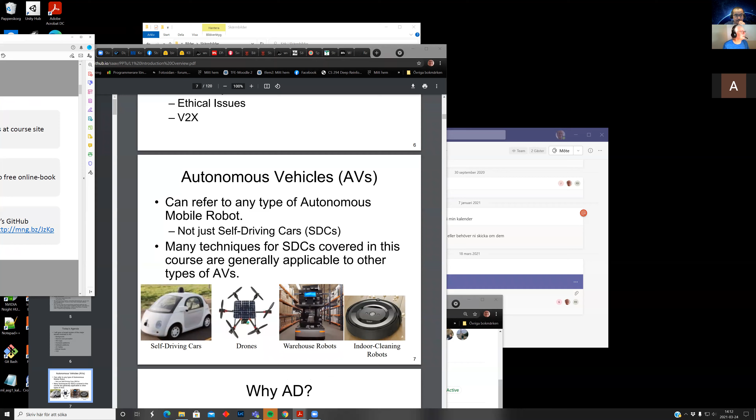Do you see me? I don't see you. I can maybe share my screen. I'll just share everything so you can see my mess. Sorry, move this stuff. Do you see my little Acrobat stuff? Hello, anyone? Yes, we can see it. Yes, we can see.

So we are going to look at deep reinforcement learning, and it's about an agent who takes action. I'll just move a little bit quickly here. So you have a software agent that takes an action which changes an environment, and you get a new state and you get a reward: is it a good state or bad state, and so on. And then you try to learn the best action to take when you are in a certain state. So how to maximize your happiness or something like that. We have a lot of material about these things.

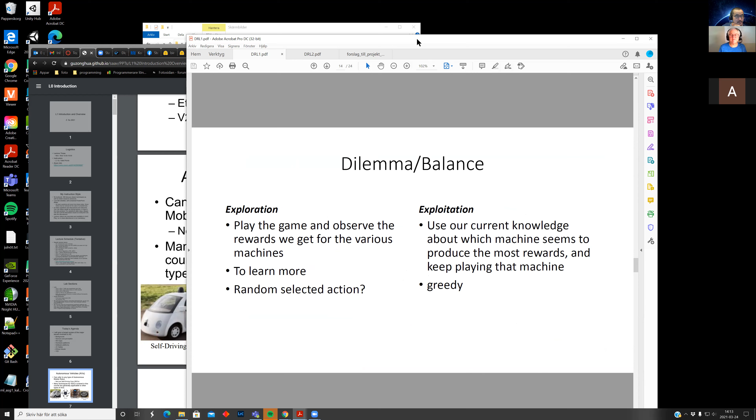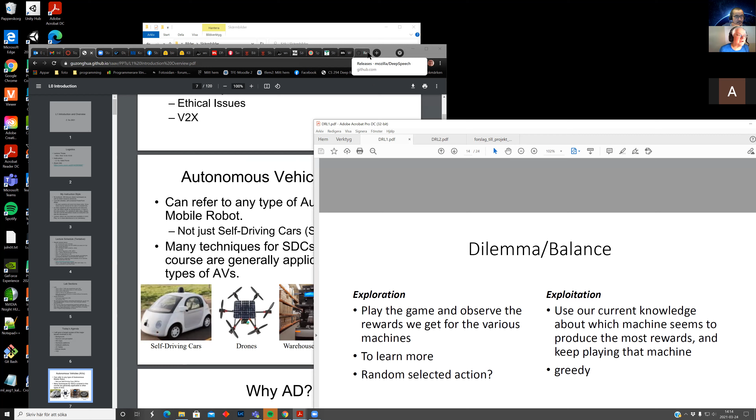And then for the deep reinforcement learning labs, we will use, let me restart it here, something we call highway environment, where we will see how a car could learn to drive and merge and handle roundabouts and maybe parking and intersections and so on. So we try to make our computers learn these kinds of things. But then it's needed to have powerful computers.

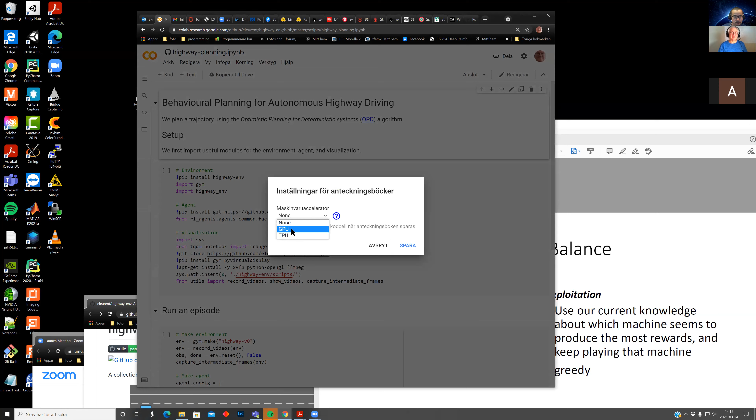So instead we will run this in Google Colab. You can open here, maybe trajectory planning. It starts in colab.research.google.com, and you have a web page where you can run your code without any need to buy expensive hardware. Here you can select accelerator, GPU, for instance, save. So here you can run in 10 minutes instead of maybe several hours on your normal PC, unless you already have an NVIDIA board like a 1070 or better, then you can run on your own computer, and you might run for a longer time overnight.

So this is about the labs. We haven't done them yet. There are many weeks remaining before these labs. So we'll see what's happening, but we will mainly go for this highway solution. Last year we had car racing and mountain car and so on, but they are a little bit demanding. It takes several days of running, so we don't plan to use them this year. So there will be some changes, and that's the reason we are not ready with them yet.

So if you have difficulties working with Colab or Python in general, Carla is an expert on these topics, so you're welcome to post questions on Canvas. Yeah, if you're not used to Python, it's good to take maybe a quick course if you're used to other programming languages. Absolutely.

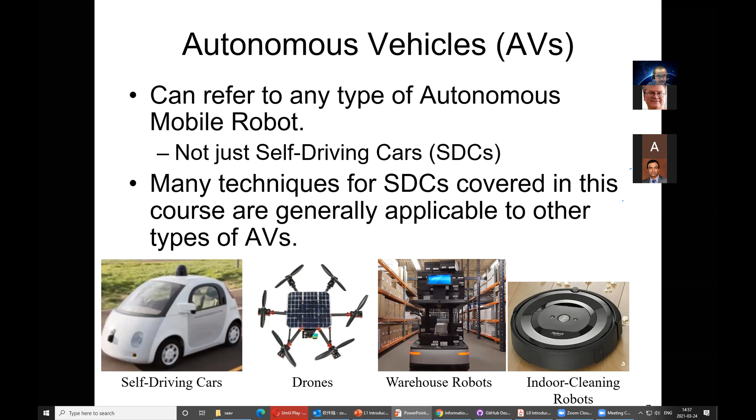So why autonomous driving? The number one motivation is reduced traffic accidents and fatalities. In the USA, in 2019, an estimated 38,000 people lost their lives to car crashes. About 4.4 million people were injured seriously enough to require medical attention. This is just data from one country. Worldwide, traffic safety is a serious issue. So hopefully AD will help alleviate and reduce traffic fatalities.

Another is reduced congestion and pollution. This may be a contentious point. You may argue that if all the vehicles are autonomous, people may take longer trips or use their vehicles more than manually driven vehicles. But it may also be possible to reduce congestion if the automation has a large penetration, so that traffic is more efficient in general, and traffic jams are less common because of better planning and better driving.

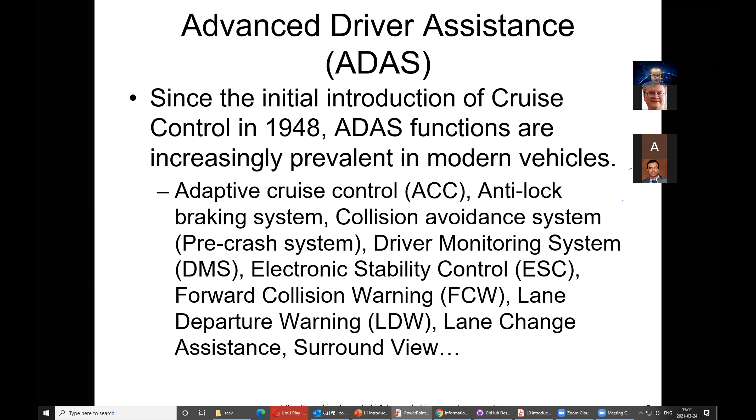So if you talk about autonomous driving, you must mention the DARPA Grand Challenges. These are competitions that really gave birth to the entire autonomous driving industry. DARPA is the Defense Advanced Research Projects Agency in the United States. They sponsored 3 grand challenges on autonomous driving. The first one was in 2004. It was held in the Mojave Desert region along a 150-mile route.

None of the robot vehicles finished the course. Carnegie Mellon University's Red Team and its car called Sandstorm, a converted Humvee, traveled the farthest distance, completing 11.78 kilometers of the course before getting hung up on a rock after making a switchback turn. Because no vehicles completed the whole course, no winner was declared, and the cash prize of $1 million was not given to anyone.

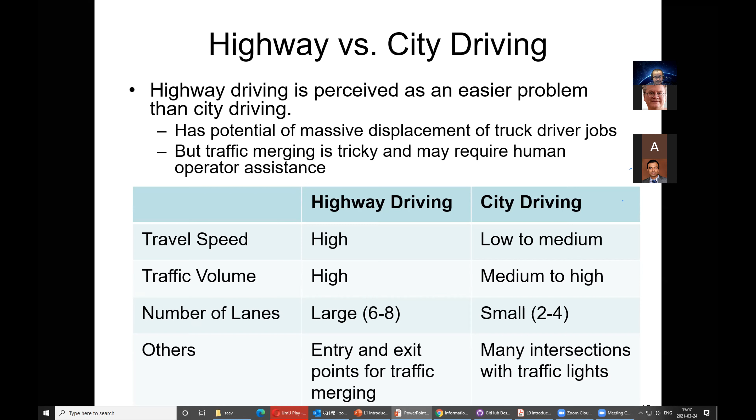So here's a very brief history of self-driving cars. It started from the 3 DARPA challenges in 2004, 2005 and 2007. Then in 2009, Google started its autonomous vehicle project. In 2012, Google's vehicle passed a 14-mile driving test in Nevada. In 2013, Mercedes and Infiniti produced cars with radar sensors and some AD features. In 2013, the National Highway Traffic Safety Administration in the US released initial policy on AVs.

In 2015, Tesla released Autopilot. Also in 2015, Uber hired 40 CMU robotics researchers to work on AVs, and Ford began testing its AVs. In 2016, there were major acquisitions and partnerships: General Motors and Cruise Automation, GM and Lyft, Toyota and Jaybridge Robotics, Uber and Volvo, and so on. In 2016 and 2017, NHTSA issued guidelines for testing and deployment of AVs and revised safety guidelines for AVs.

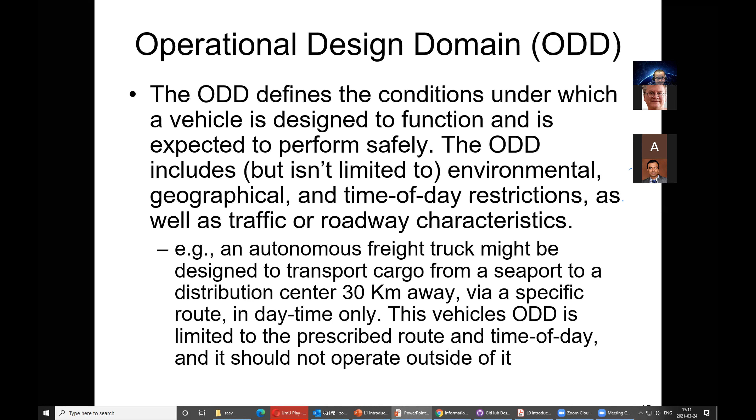So the 5 levels of automation. Level 1, driver assistance. So that's the ADAS features that either control steering or speed to support the driver. So level 2, partial automation. So both steering and acceleration are simultaneously handled by the AD system, but the human driver still monitors the environment and supervises the support functions.

So in level 1 and 2, you are the driver, even when the automation features are turned on, and the system supports you while driving. And then level 3, you notice that there's a large gap between levels 2 and 3. So level 3 is conditional automation. So the system can drive without the need for a human to monitor and respond. However, the system might ask a human to intervene, so the driver must be able to take over control at all times.

So for level 4, it's high automation. So these systems have high automation and can fully drive themselves under certain conditions. That is within the ODD. So the vehicle won't drive if all conditions are not met. So I have a typo here, the unlimited ODD. So the last, the highest level is level 5, it's full automation. The vehicle can drive whenever, wherever with unlimited ODD.

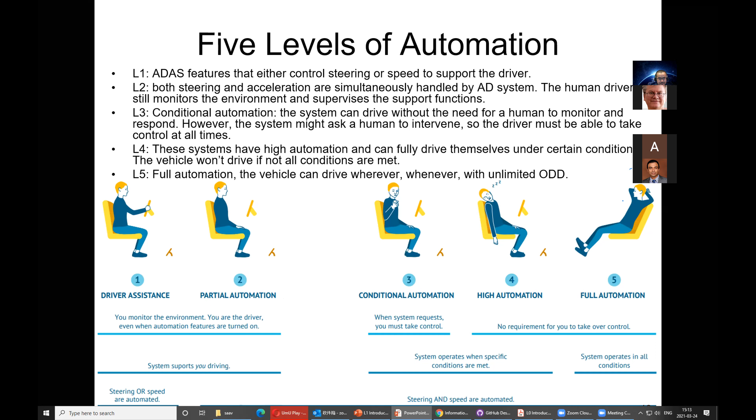So most autonomous vehicles today operate at level 3 or lower, for example, Tesla is level 2. So the large gap between levels 2 and 3 means that it's a difference between ADAS and autonomous driving. So current commercial products are at most level 2. So Tesla sometimes says they're level 2.5. Sometimes they say it's level 3. But generally it's a level 2 or 3. So automakers keep pushing the timeline of level 3 and above to the future.

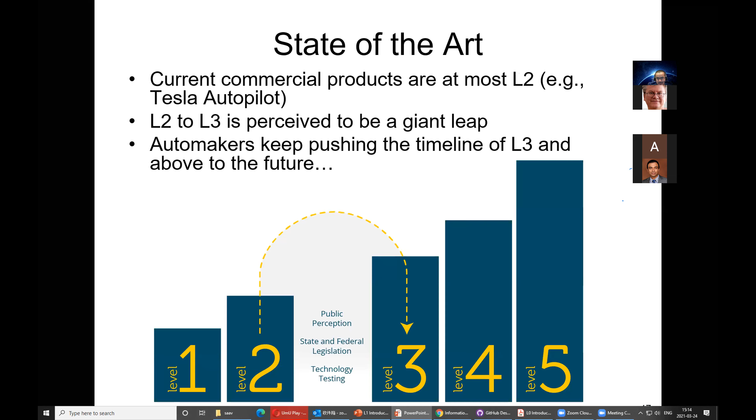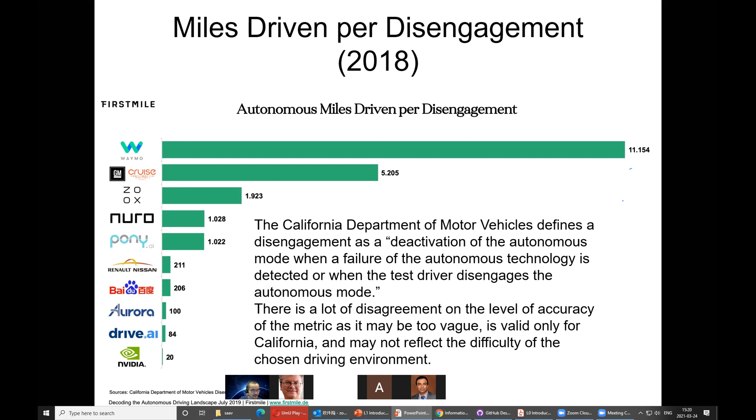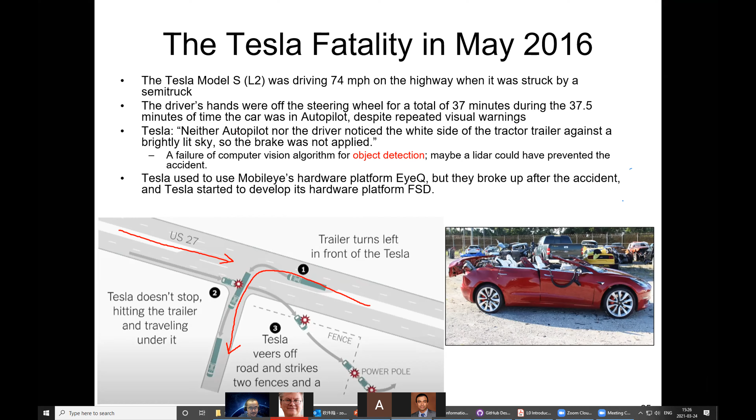So in 2018, a man died from a high-speed crash because his Tesla autopilot system steered the vehicle into a median on Highway 101 in Mountain View, California. So here's the highway. So this is the lane, and the vehicle steered to the left and onto the median, causing a crash. So the National Transportation Safety Board investigation report lists 23 findings that enumerate all the factors that contributed to the fatal collision.

So the limitations in Tesla's autopilot lane keeping assistance function caused the vehicle to veer into the median and failed to provide an alert to the driver in the seconds leading to the crash. So in the previous accident, at least the vehicle alerted the driver, but the driver did not take control. In this case, the autopilot did not even warn the driver. So essentially, the lane detection function failed. So it thought that the lane leads this way, but it actually leads into the median.

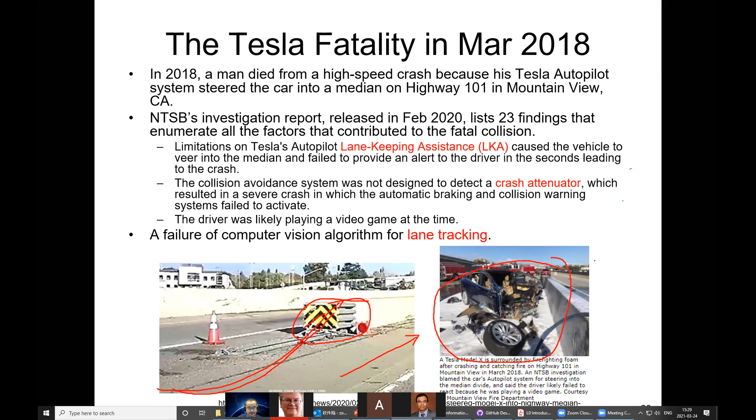So this resulted in a severe crash in which the automatic braking and collision warning system failed to activate. And also the driver was not paying attention. He was likely playing a video game at the time. So it's a failure of the computer vision algorithm for lane tracking. So this is the after the accident picture, and the white foams are the firefighters' fire extinguisher foams.

So in all these accidents, Tesla really has no responsibility, because in the user's manual, it's clearly written that it's an L2 vehicle, and the human is responsible for the safety of the vehicle, and a human should take over control whenever there's a warning or whenever something is unsafe. So if a driver overtrusts the technology and the vehicle has an accident, legally, Tesla is not responsible for it.

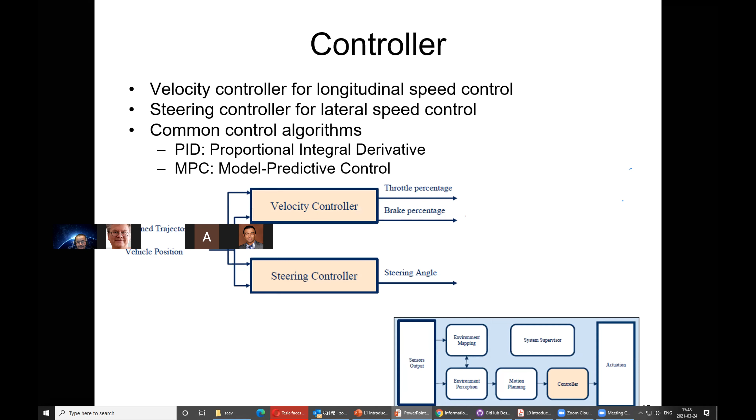So the planner feeds the planned trajectory, that is a vehicle pose as a function of time, into the controller, and the controller's job is to follow the planned trajectory. The classic AD processing pipeline has separate algorithms for each processing stage, including perception, planning, and control. So where does machine learning and deep learning come in?

Convolutional neural networks for perception are well accepted today. Essentially, you are placing a deep neural network as a perception algorithm to replace the more traditional computer vision algorithms. That's actually the current industry practice. And DNNs trained with imitation learning or reinforcement learning for the decision-making part of the pipeline are still in the early research stage. So essentially you are letting the neural network cover more of the processing pipeline.

It could be halfway, performing perception and planning but leaving control to the traditional PID controller, or could be end-to-end, from perception to control, where the entire pipeline is replaced by a single deep neural network. Halfway hybrid approaches are also possible, where you map from input image pixels to waypoints used for planning, and then subsequently the planner and controller are done by classic techniques.

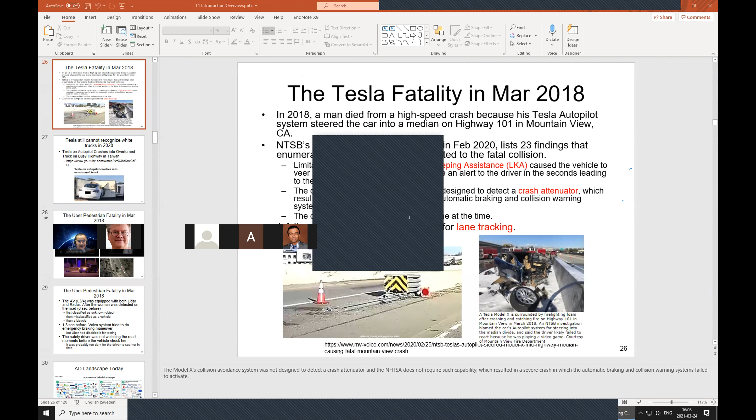Please read more about them, as classic pipeline model. You can search about it. It's nice if you read recommended references instead of searching. Yeah, so many of the slides have a link at the very bottom. For example, this picture comes from this article, and some of them I don't have. So this picture is from this blog. This is from the news. And I often put a page at the end of every lecture as additional readings. So this particular report is a very good overview of the state-of-the-art technology in 2020.

The particular thing you asked about, the classic techniques, yeah, I think I can pull up a few links. That would be nice. Thank you very much. Yes, I will do that later.